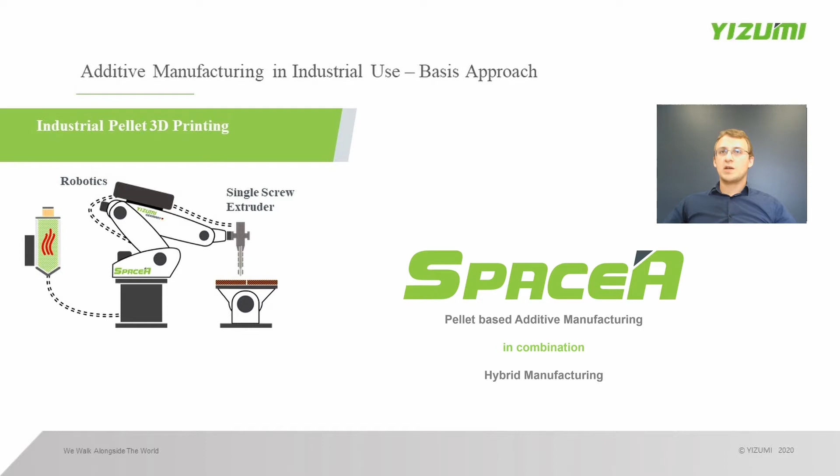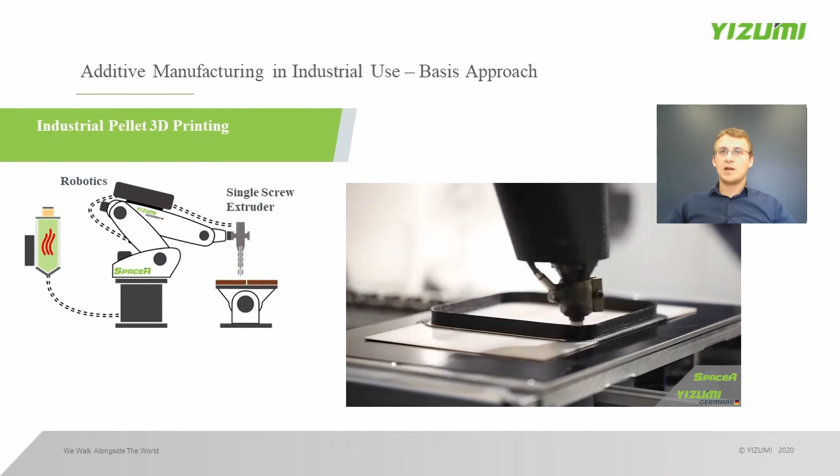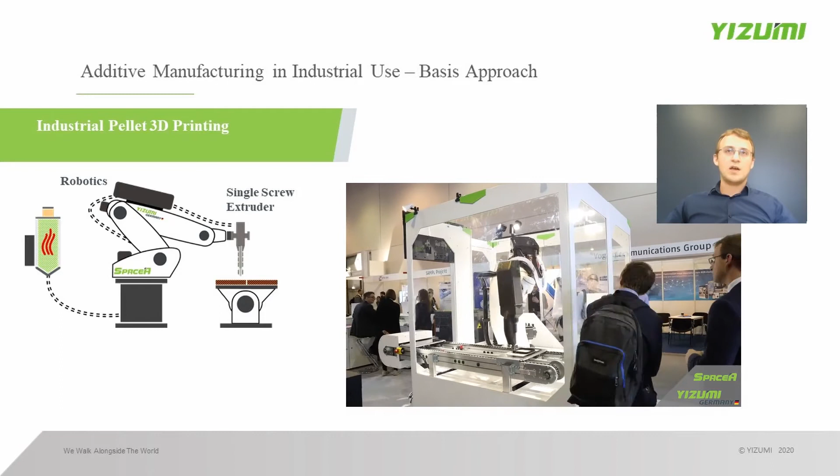What is the basic situation now? We start with the melt strand, and we put that melt strand on a substrate. And due to the fact that we have a solidifying strand and we are running with a new melt strand over it, we can build up a three-dimensional part like we see in this video. This is a presentation of the trade show of the Formnext 2018, where we produced the parts you can see here every 35 minutes in a completely automatic process chain. So we produce a part, the piece carrier supply chain here will put the part outside the manufacturing cell, and we will start automatically with the new part.

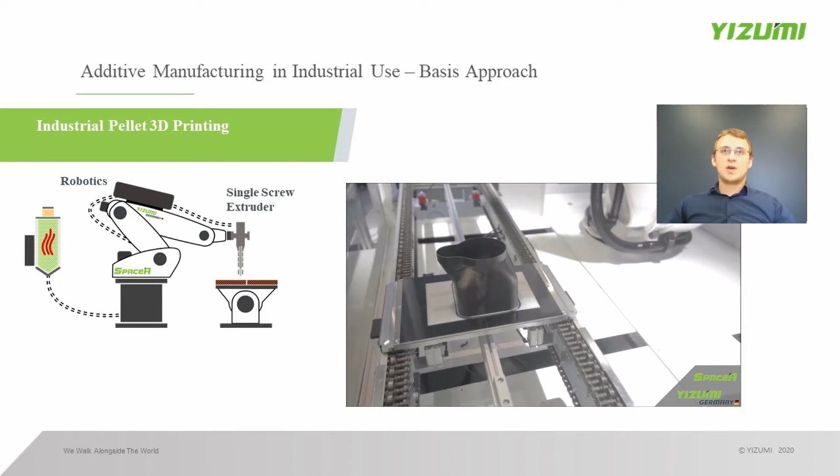What you can see here in the video is that we have a trade fair manufacturing cell. That means our robot is way too big for that part. It's really sensible to reduce the robot size according to the part size, and then you can achieve an economic situation. But what is really good to see here is the automatic approach and what you can do in terms of scalability, but also in terms of line integration.

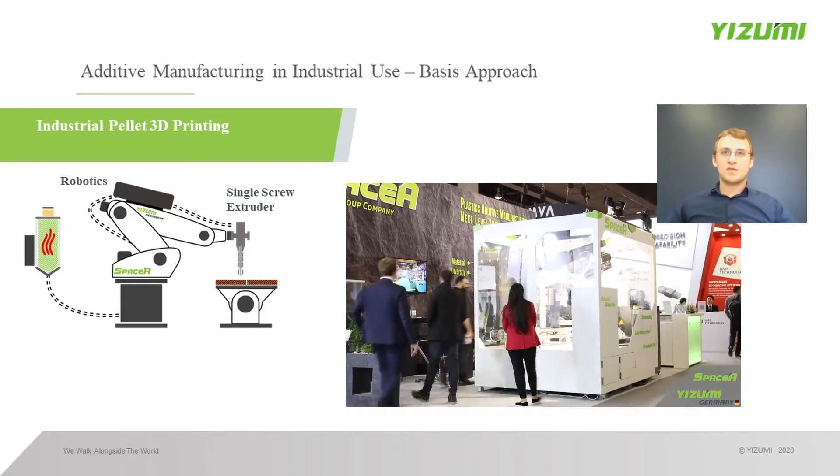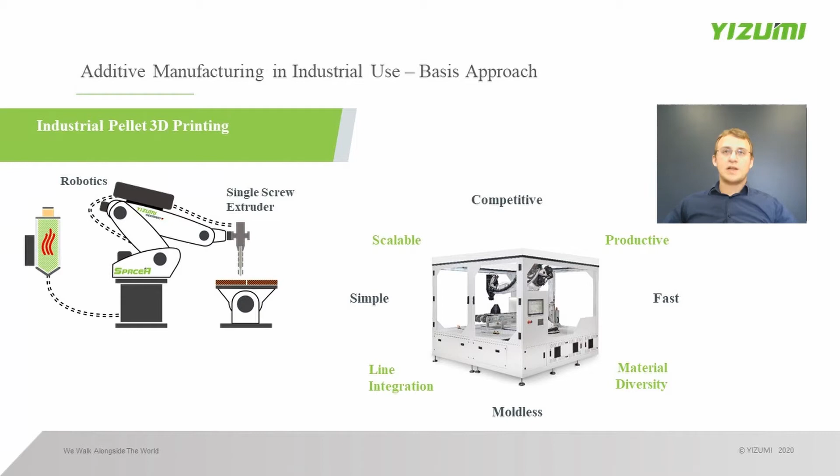If we go forward, we can see that our situation is the productive technology. We want to achieve line integration. We want to be able to process different thermoplastic materials. So you can put every granule you have in mind inside of our extruder, and that's mostly not the problem. We can extrude most materials, but afterwards you have to check if it's possible to print that material to a three-dimensional part. And what's really important for us as machine suppliers is that we can support you with a technology which is simple, which is fast, and moldless to be competitive with injection molding.

Compared to injection molding, we are only competitive in the range of 10,000 parts per year. If we want to produce a higher lot size, something like 100,000 parts per year, then perhaps the break-even is not on the side of additive manufacturing, and injection molding is the best choice for that. But you can also see, if we only want to produce 10,000 parts per year of that part design, our additive manufacturing technology is quite a good solution to fulfill that job in an economic way.

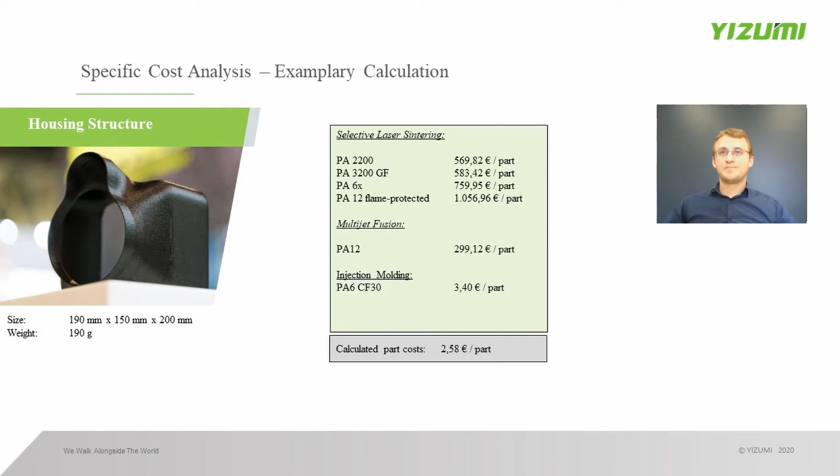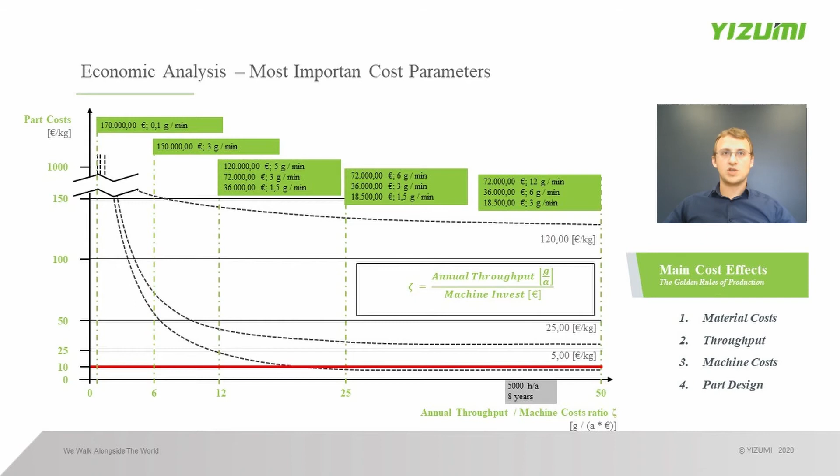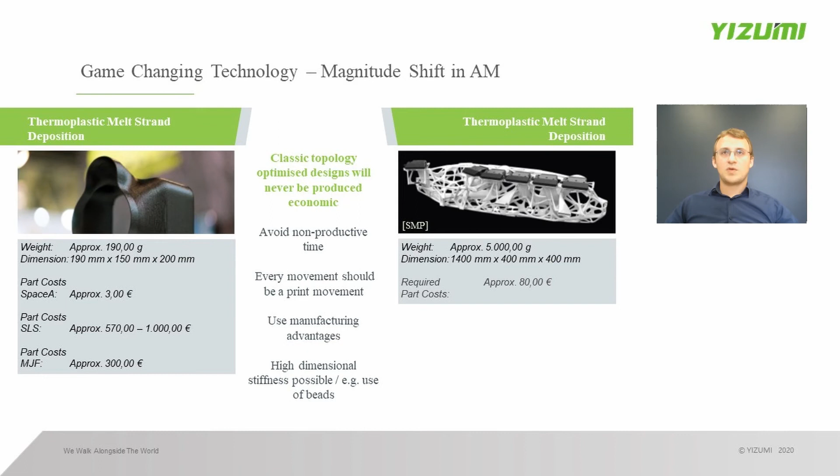And if you compare that to possibilities in designing, we will see, okay, we have to design that perhaps more like sheets, and we have to design in a different way. So not the bionic structures like we see in that picture, but we have to design perhaps our parts a little bit different. And for that, I want to give you a short overview about a design study we made together with the AZL in Aachen and Akro-Plastic.

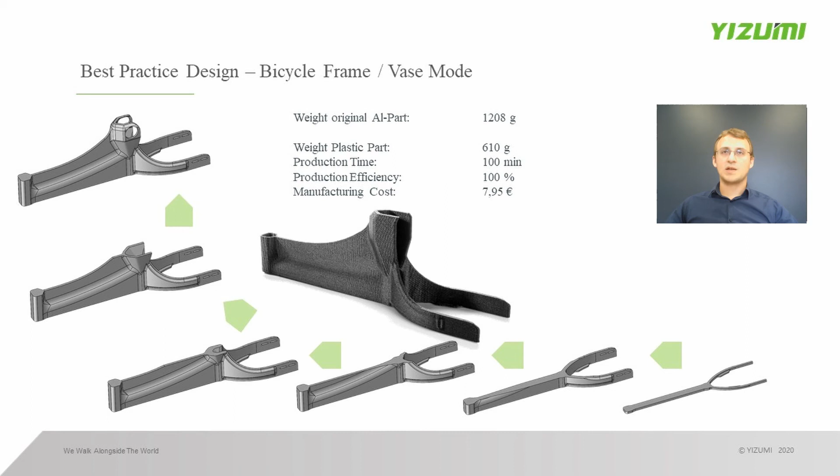Because additive manufacturing, in terms also our melt strand deposition technology, enables us to integrate hollow structures to increase the stiffness of the part, or we can use that technology to produce really thick wall thicknesses. More than 10 millimeters are possible here. And if you imagine what is possible with a 10 millimeter polyamide carbon fiber filled material here, you can imagine how strong and how stiff those angles are at the end.

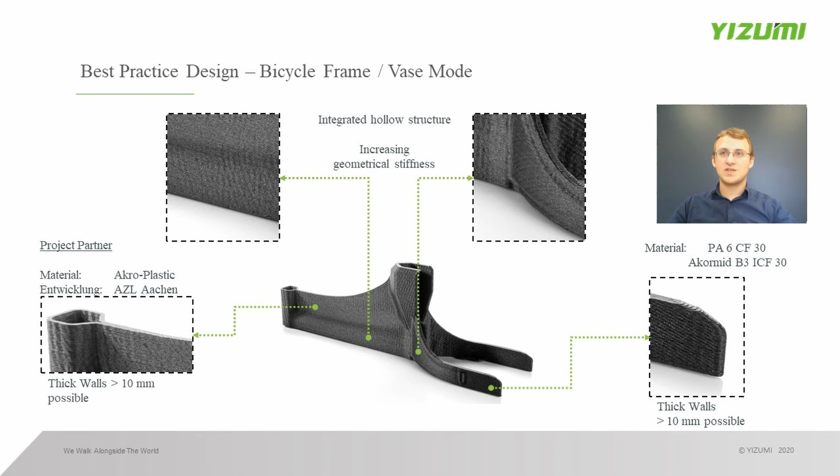And we can just produce those thick wall thicknesses or the hollow structures without any cycle time effect. So that is really an advantage of the technology, but we have to design according to those possibilities. And for sure, we also built it up together with the AZL, like I mentioned. And it's also possible to ride that little bike.

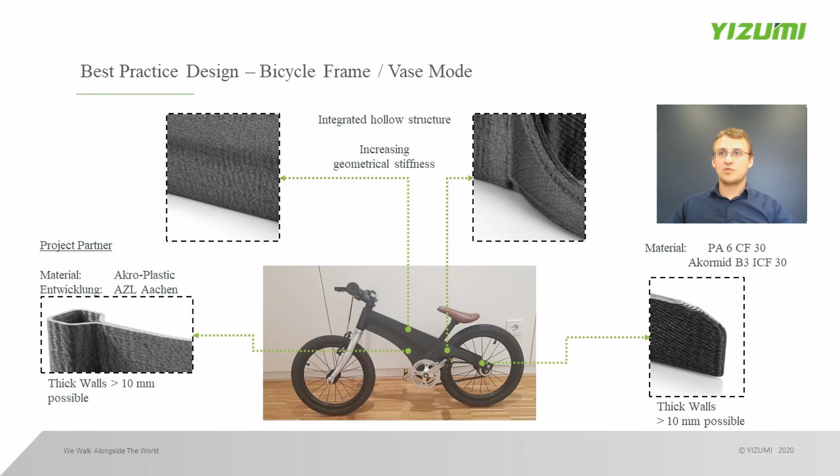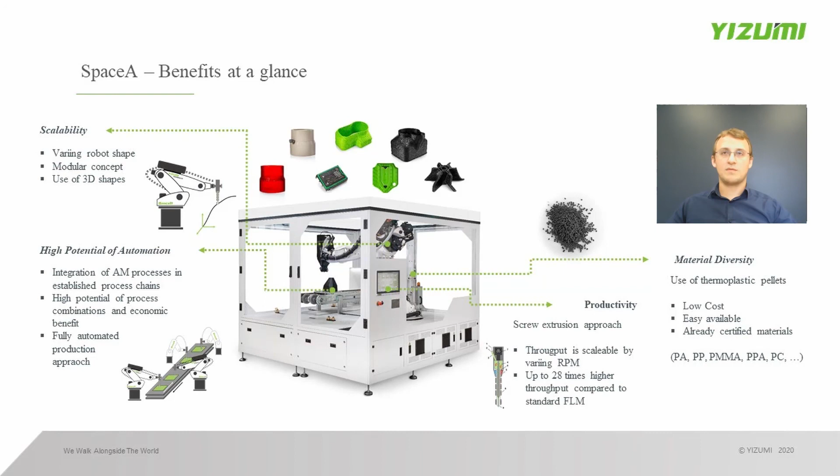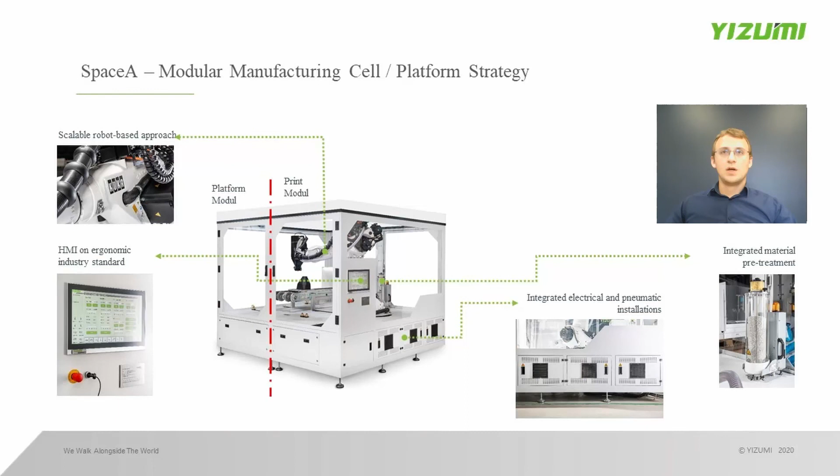Last but not least, I want to present our modular platform strategy. We have not only our big machine sizes with print module and platform module, we have also our small machine sizes with different dimensions and scalabilities. And you can imagine that we have a good pricing approach right now here because it's easier for us to handle it. We are also working on metal plastic hybrid parts, and you can always ask us and get in contact with us to get some information about that.